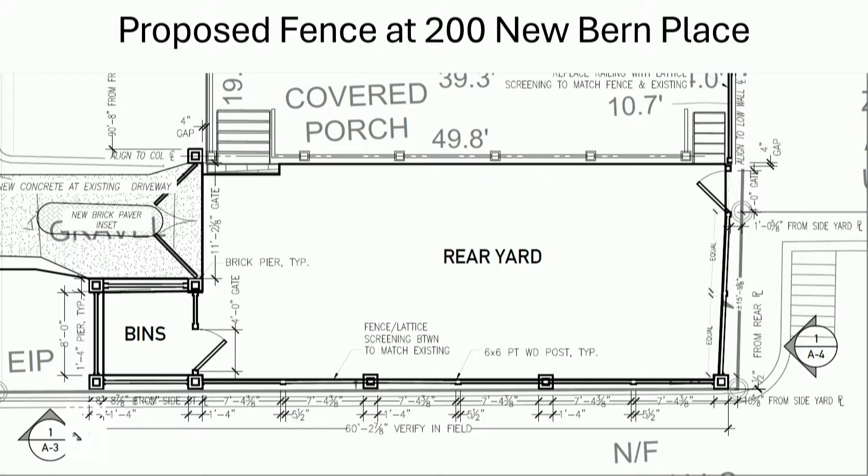There are some really great lattice details on the existing porch, and they are definitely an inspiration for what we're trying to do. It's a corner lot, so this is the side yard from the Blount Street elevation, where we're trying to provide openness and riff on those great lattice details existing on the porch. There's a pair of gates, basically an 11-foot-2 opening, so they'd swing out about 5.5 feet toward Blount Street, leaving plenty of room for a car to come through the gate and stop before entering the street.

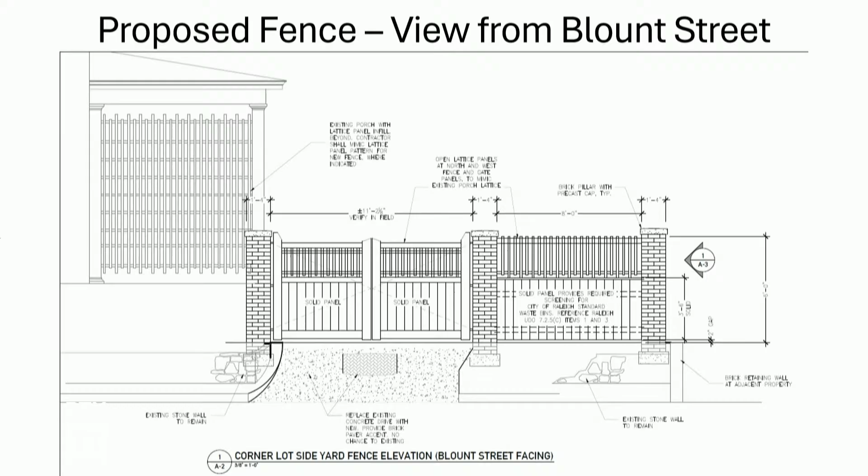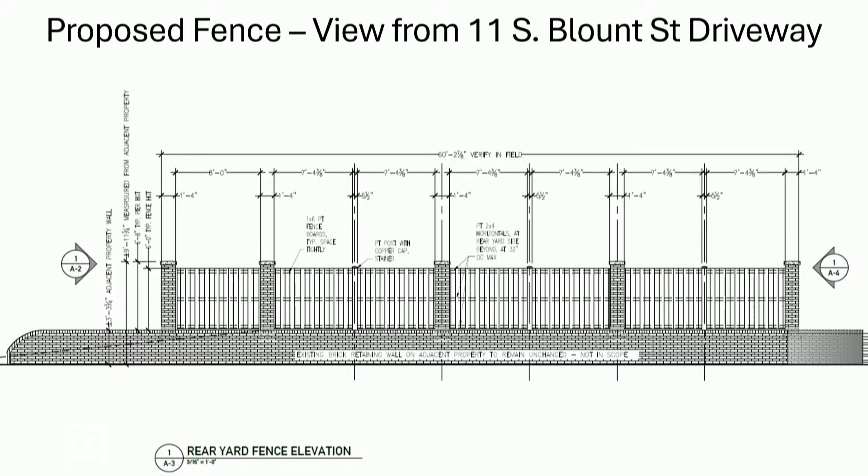So our proposed fence would be on top of that—we're about 6 feet on our side of the property, but it does present right at the edge. I know there's been some concern about the footings and how they might impact this existing wall. From early stages in the process, we've had Andy Warnke as our structural engineer we work with a ton, and he's here tonight as a witness. While this isn't a technical submittal—this is a compliance submittal—we have communicated our intent to have a technical solution that does not impact this existing brick retaining wall.

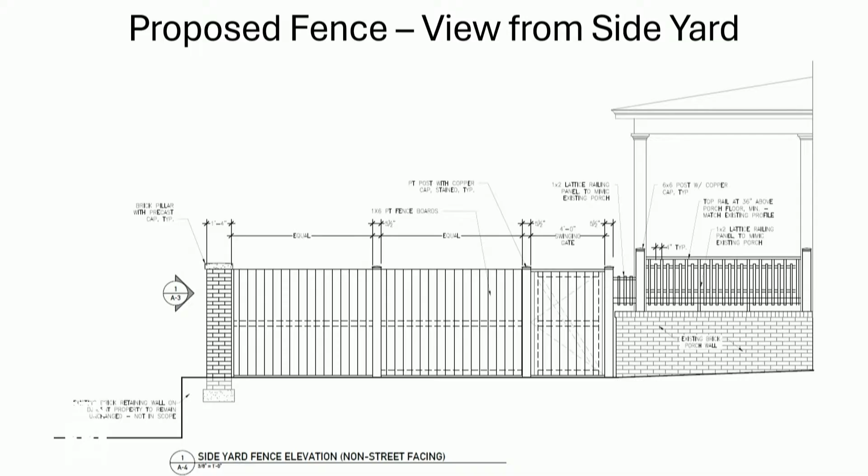Turning the corner to the other side yard, we have more of a pillar at the corner, then some wood posts with infill panels, continuing to secure the porch area with the lattice material. Finally, this is a 3D take showing more context in all dimensions of the items I've just talked about—you can see the slight rise of the slope of the driveway, the gate recess, the jut-out for the trash bins, and the fence on top of the existing retaining wall.

It's sitting on our subject property above the retaining wall—it is not actually built on top of the wall. That is correct. So with that, I'll turn it back over to Worth.

Thank you, Craig. I will go briefly through the guideline consistency and the standards identified in the staff report. First, for section 1.3.1, retain and preserve landscape features that contribute to the overall character of the district—to that, we would say that Mr. Dean has designed a fence inspired by the neighboring properties within the Capitol Square Historic District and has used similar high-quality materials in this design. Section 1.3.2, retain and preserve the historic relationship between buildings and the historic landscape features of the district.

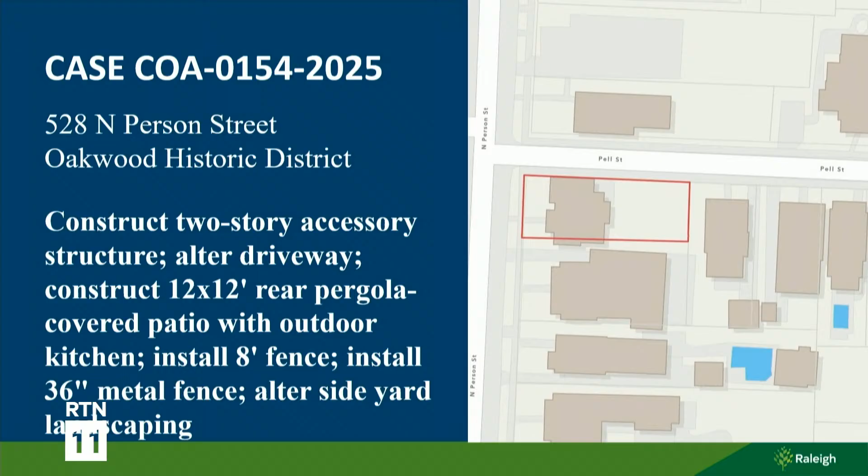As you just said, this is case 154, 2025 for 528 North Person Street. It is in the Oakwood Historic District, and as you can see from the view here, it is a corner property at North Person and Pell. You may recall you previously heard this case in January, I think. The request is to construct a 2-story accessory structure, alter the driveway, construct a 12 by 12 rear pergola, covered patio with outdoor kitchen, install an altered 8-foot fence, install a brick and metal fence, and alter side yard landscaping. This is a view of the property from North Person Street and from the intersection at Pell.

Going down Pell Street here to the rear yard and existing fence condition. Again, a better view of that rear yard. This is from the northeast property corner, looking into the rear yard where the current house is. And again, a view of the existing rear yard.

An abbreviated summary of staff concerns: built area to open space ratio, and height. However, the updated materials have addressed some of your comments regarding height, tree removal without replacement, patios with defined borders or picture-frame style, and materials and details that are typically provided as conditions. Thank you. I'll call on the applicant for their presentation.

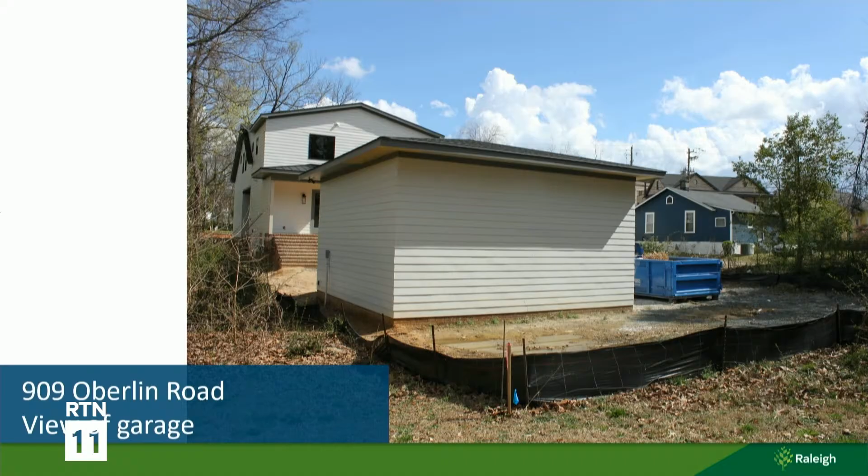The property is currently under construction, so this is the new primary structure on the site as viewed from Oberlin Road. Work is still ongoing here. This is a view of the north side of the property, moving toward the rear yard. Garage on the right, primary structure on the left. And a view from the rear property line looking back toward Oberlin Road. You can see here the rear porch and yard with the proposed alterations, as well as the topography and relationship to the structures.

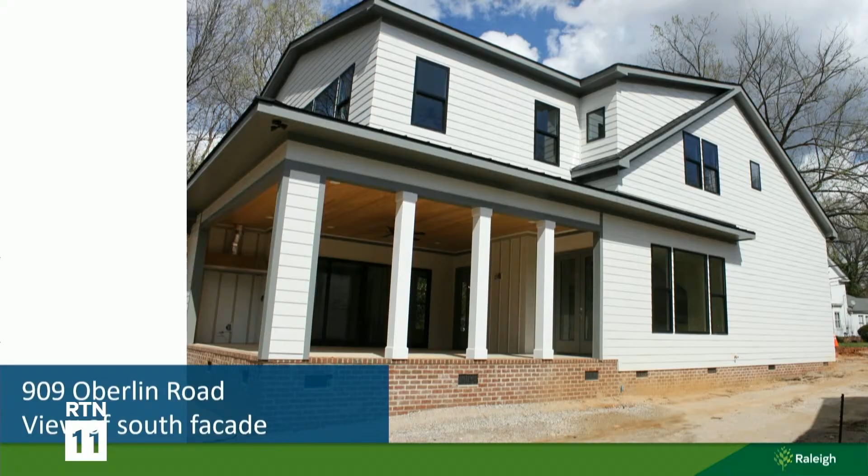Another view of the south facade. Summary of staff concerns: evidence is not provided to support the extent of the proposed porch lattice screening, railing installation to the inside of the screening, and the proposed south fence line configuration. Site topography alterations for the rain garden are unclear, and the required tree protection plan from the new construction application is not currently implemented.

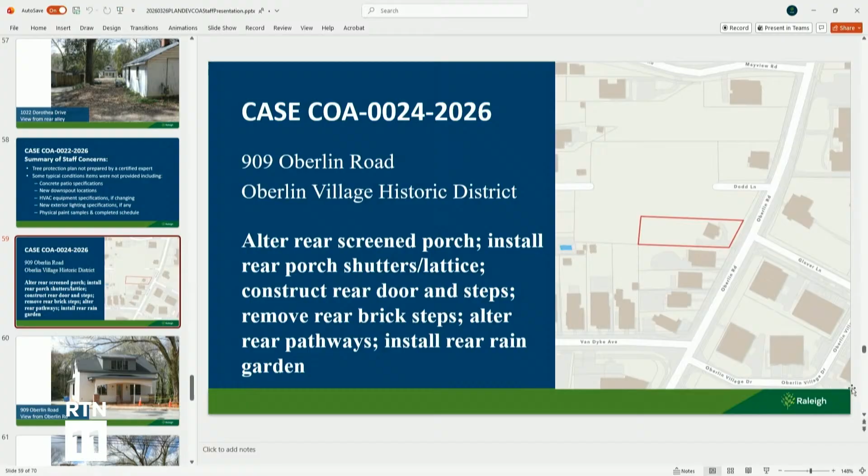And the applicants are here to answer any questions. All right, I'd like to invite the applicant up to the podium.

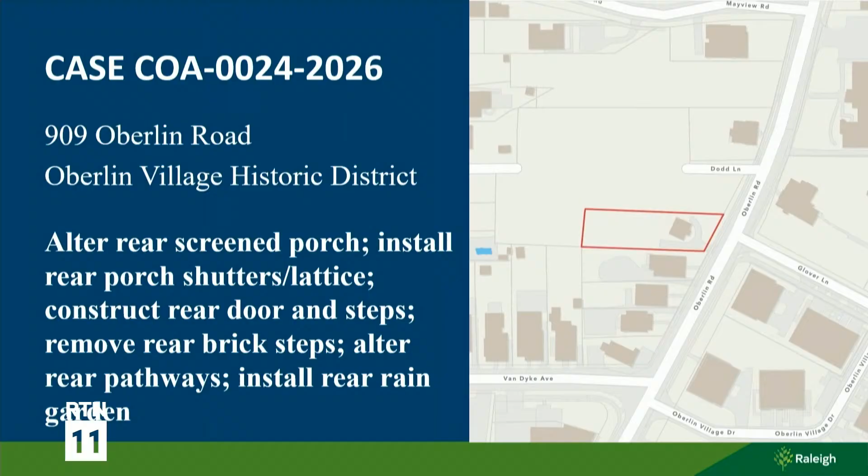Hello, will you both be providing testimony? All right, so if you'll both give me your name, address, and relationship to the case, and we'll swear you in at the same time. I'm Diane Becker of Becker Law Offices, 6030 Creedmoor Road here in Raleigh, and I'm the attorney for Copper Builders LLC. Mr. Anderson will be presenting on their behalf. My name's Alex Anderson. We operate at 3749 Benson Drive in Raleigh, and I'm the president of Copper Builders. All right, very good. Would you mind raising your right hand? Do you swear or affirm that the testimony you'll provide will be the truth, the whole truth, and nothing but the truth? All right, thanks so much.

You may proceed. Well, Chair, if I could, do you mind if I have a word just before they get started? It might influence your presentation and response. We've seen your project a few times, so we're glad to see it again. Always good to see familiar faces and projects. When I was doing my site visit, I couldn't help but notice one key detail: the trim around the windows, or lack thereof, deviated fairly significantly from the approved COA 135, 2024. I didn't want to assume the primary structure is complete, but it looks far enough along that maybe that's not going to be added. Just wanted to mention that to my colleagues here, and allow you to respond to it at some point in your presentation. I know that's not included in the current application, but for what it's worth, just wanted to point that out. So thank you, take it away.